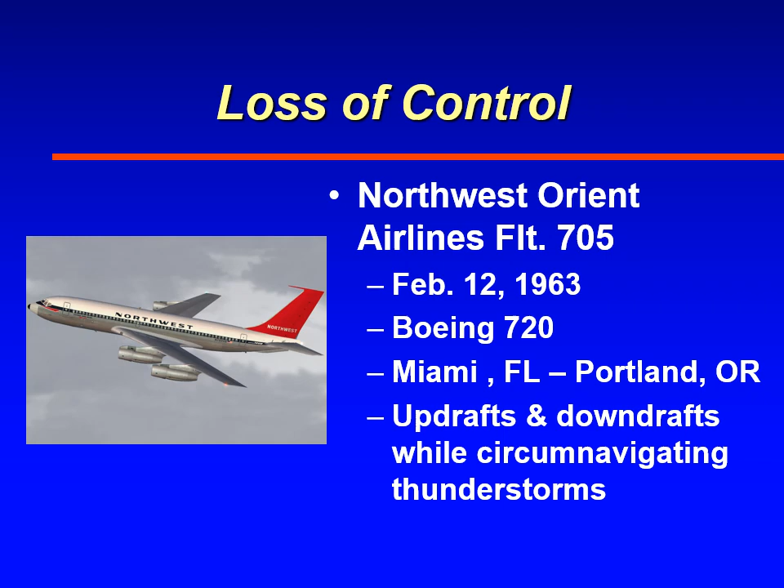Those strong updrafts and downdrafts resulted in moderate to severe turbulence. The flight crew lost control of the aircraft. After the accident, the investigation found the aircraft had been overstressed. They said that it experienced plus 1.5 to minus 2.8 Gs. So the flight crew lost control of the aircraft. As the aircraft was overstressed, it broke up in flight, and as a result, it crashed in the Florida Everglades, killing 43 people.

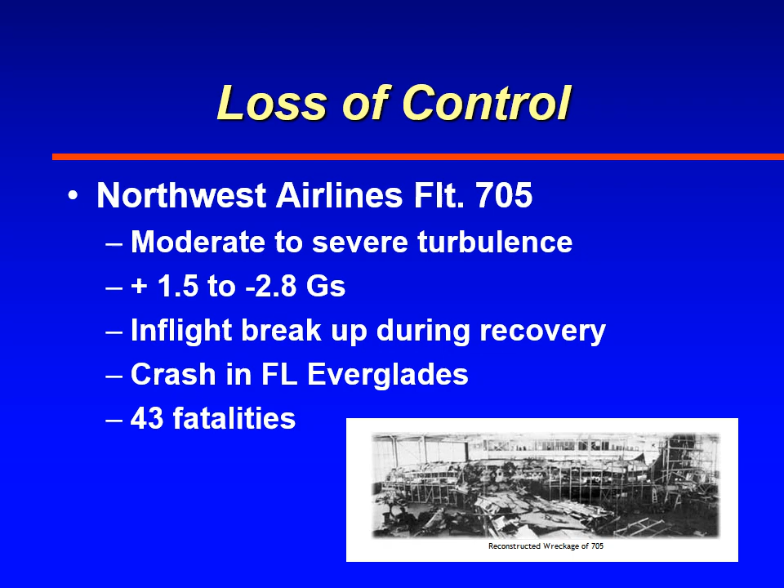Another hazard associated with aircraft encountering turbulence is airframe damage. There are a number of examples of airframe damage, aircraft being overstressed and experiencing structural damage as a result of turbulence. We're going to look at a few. The first one deals with the British Overseas Airways Flight 911, which happened back in 1966. This was a round-the-world flight.

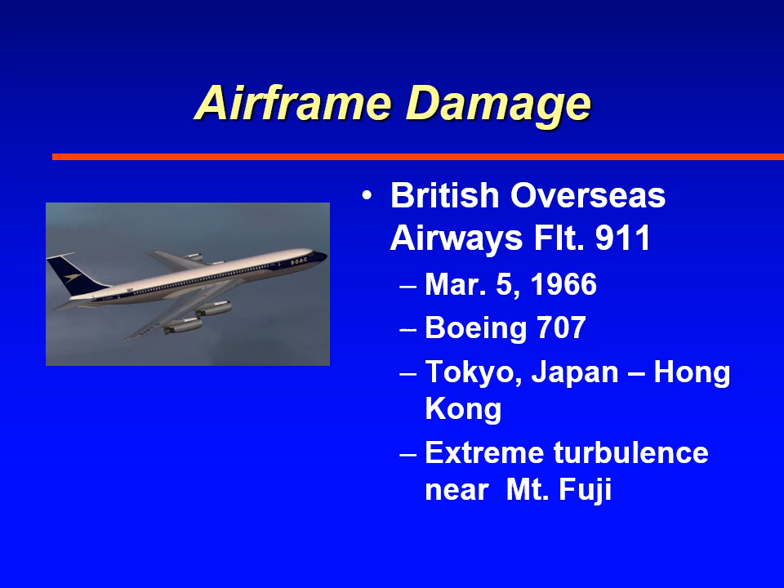The aircraft departed London on its way around the world with tourists, and one of their stops was Tokyo. They overnighted in Tokyo, and they were departing the next morning for Hong Kong. Since this was a tourist flight, they were going to circle around Mount Fuji. As the aircraft circled around Mount Fuji, it experienced extreme turbulence. The extreme turbulence resulted in the aircraft breaking up in flight at about 17,000 feet, and all 124 passengers and crew died in the accident.

There are several pictures that resulted from this accident. Mountain climbers actually got pictures of this as they climbed the mountain. And then also a U.S. Navy A-4 attack aircraft was dispatched in short order after the accident to fly around the mountain, and that aircraft experienced plus 9 to minus 4 Gs.

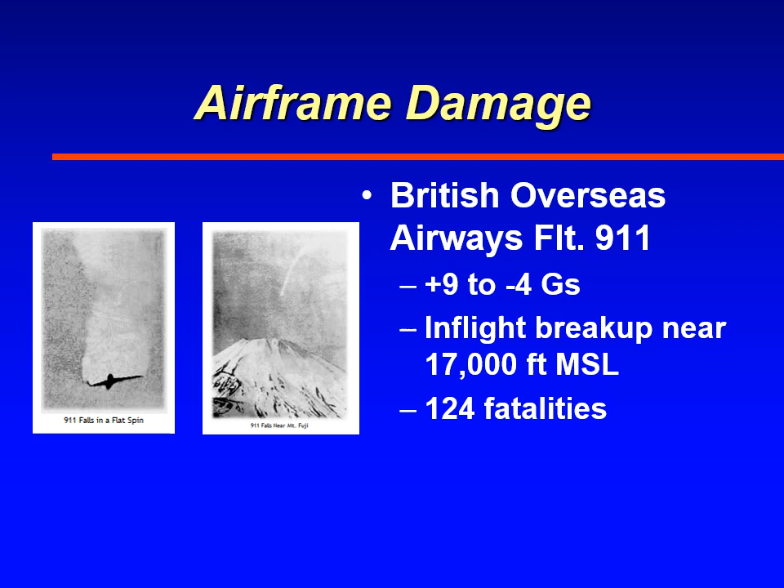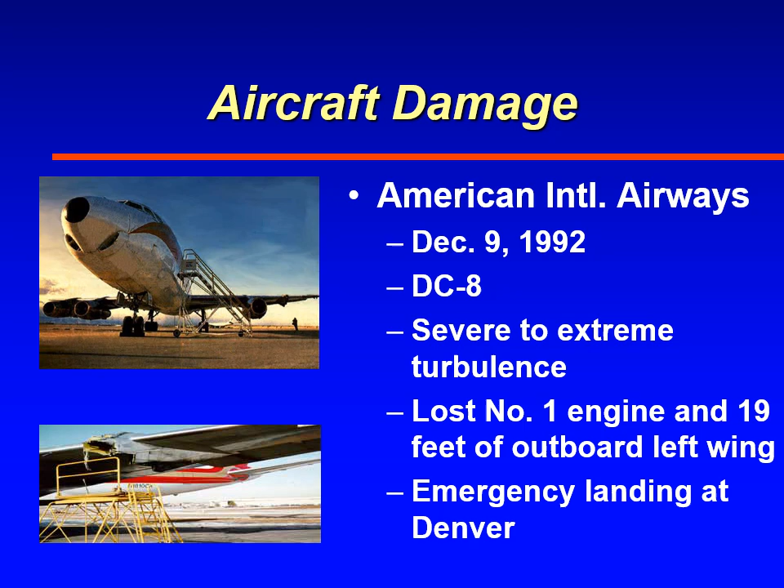Here's another example of structural damage resulting from turbulence. This aircraft was a DC-8 flown by American International Airways. It was a cargo hauler. They were flying over the Colorado Rocky Mountains on December 9, 1992. The aircraft experienced severe to extreme turbulence. As a result of the turbulence, the number one engine departed the aircraft, as well as 19 feet of the outboard left wing. The aircraft made an emergency landing in Denver, where these pictures were taken.

Yet another accident resulting from severe turbulence, which caused structural damage to the aircraft, was JAL 46E, which happened back on March 31st, 1993. It was a 747 freighter. They departed Anchorage, Alaska, bound for Chicago, Illinois. At 2,000 feet MSL, the aircraft experienced severe to extreme turbulence. As a result, the aircraft lost its number 2 engine, and the aircraft was able to safely land back at Anchorage.

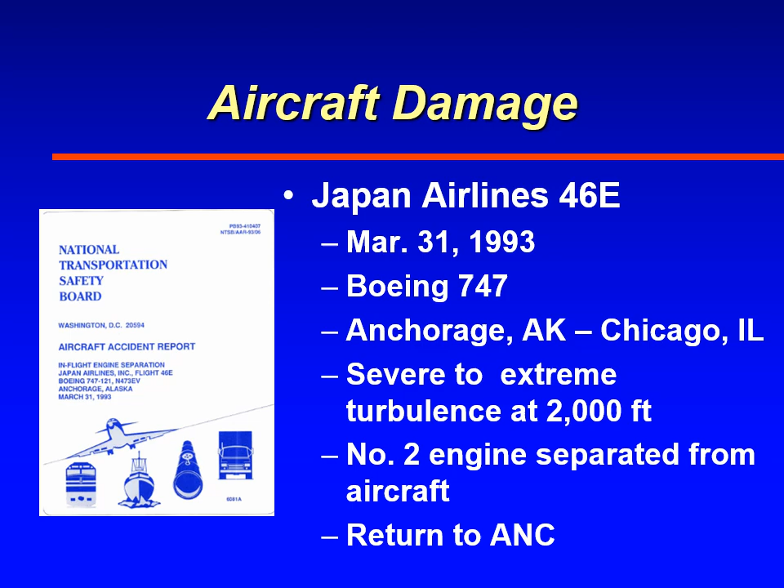Probably the most memorable accident that resulted from severe to extreme turbulence happened back in 1964. A B-52 bomber doing a test flight at low altitude near Pikes Peak in Colorado experienced violent turbulence, and as a result, the aircraft lost its vertical stabilizer and rudder, and the flight crew were able to keep the aircraft aloft for 4 hours. They eventually landed at Wichita, and this is all documented with video.

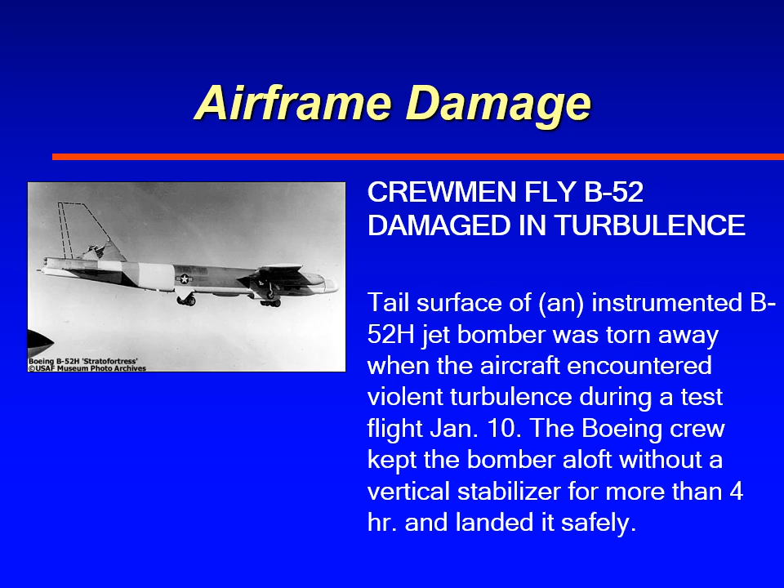You can see the video on YouTube, and also there is an accident investigation that was done by the Air Force, which is also a video on YouTube that you can watch. The tail surface of the aircraft, of course, was ripped away during an 8-second period where the aircraft experienced violent turbulence. The aircraft, without a vertical stabilizer or a rudder, yawed back and forth in a 20 to 30 degree arc, but the aircraft maintained altitude. Once again, go out to YouTube and watch the accident investigation video.

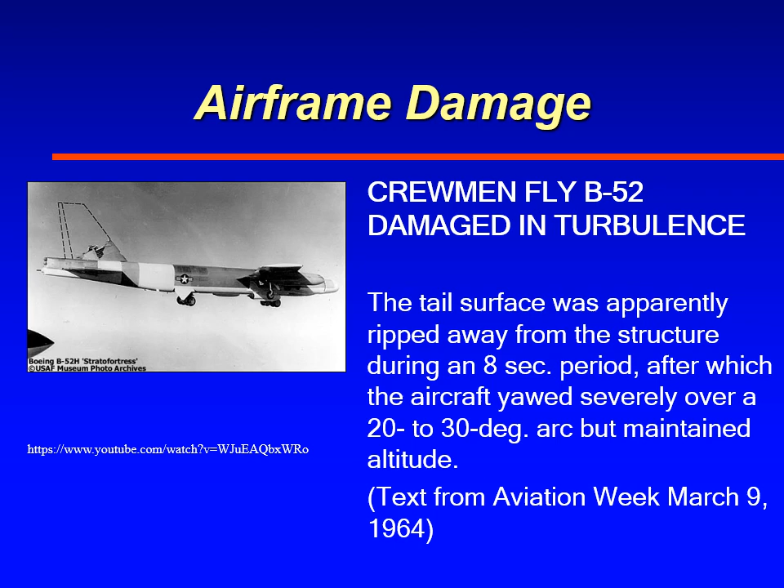Another hazard associated with aircraft encountering severe turbulence is passenger safety. Every year there are a number of accidents that result from passengers being injured on commercial aircraft. Here is one that is very memorable. It was back in December of 1997. United Airlines 826 was flying from Tokyo to Honolulu when it encountered two very closely spaced severe turbulence encounters.

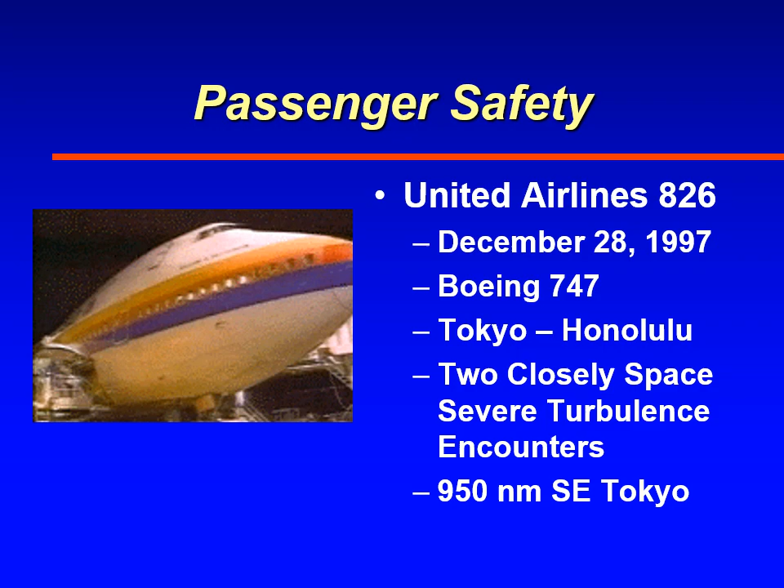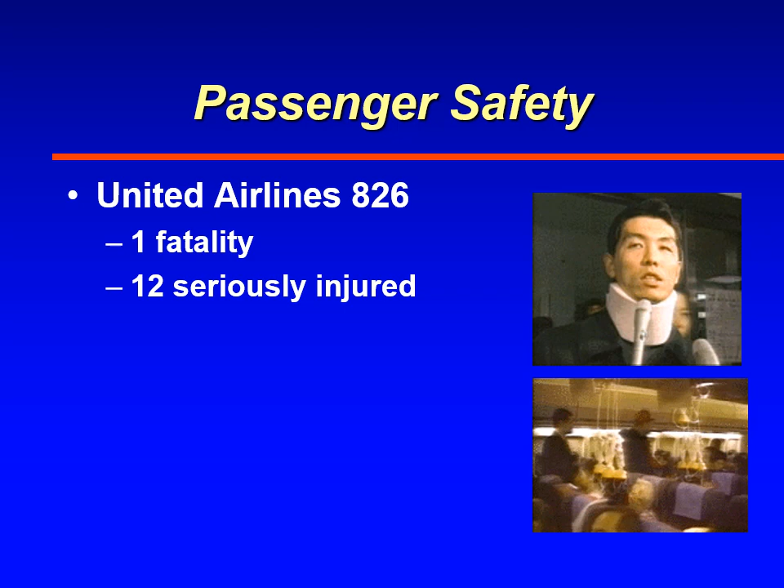This happened about 950 nautical miles southeast of Tokyo. The severe turbulence encounter resulted in one fatality. One passenger was killed, and 12 were seriously injured on the flight. We just saw how severe turbulence can be hazardous for aircraft and went through several examples. Now we're going to look at the accident statistics that have resulted over the years.

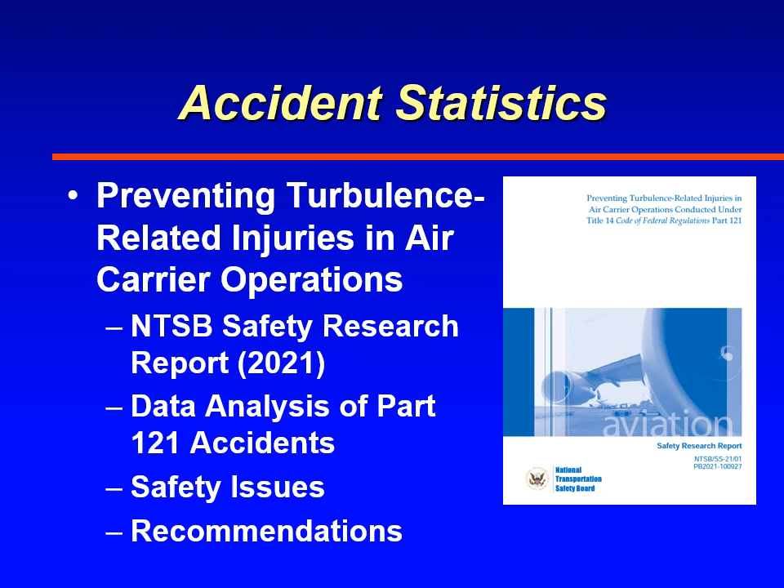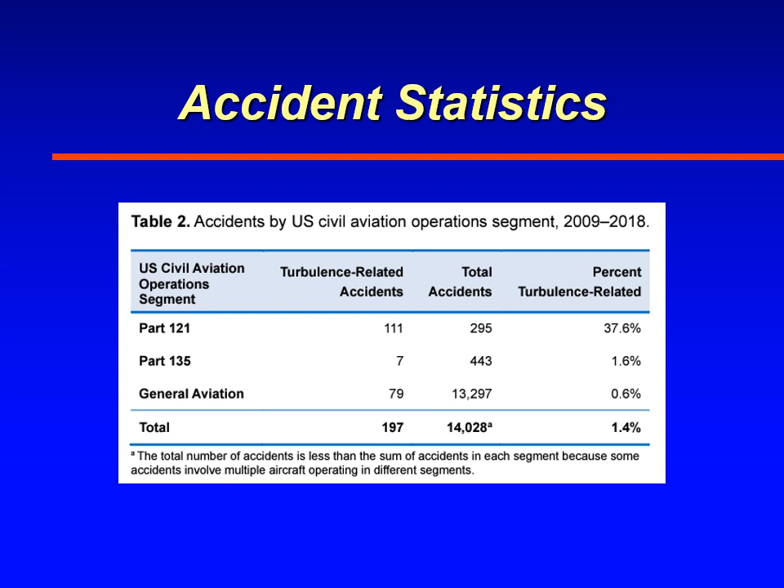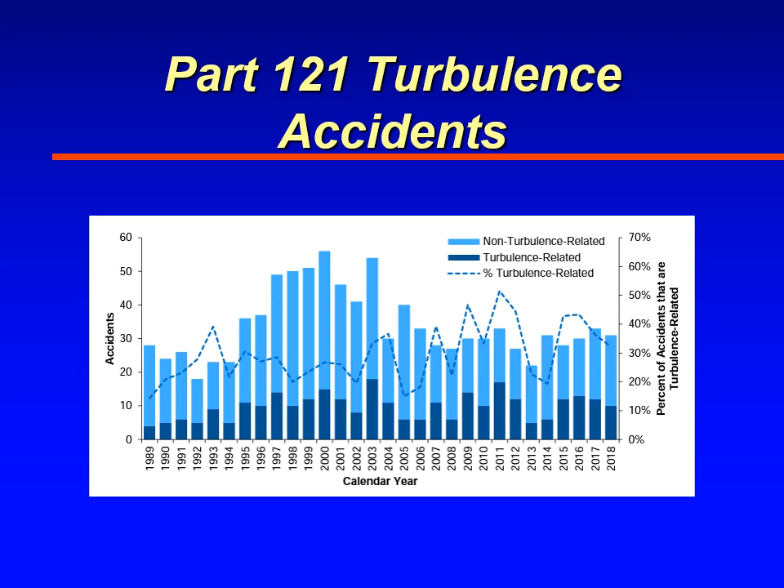The report showed that over a 30-year period from 1989 to 2018, there is no clear trend in the change of Part 121 turbulence-related accidents. Some years it's as low as 20% of all accidents, and other years turbulence caused more than 50% of all air carrier accidents. The report also showed that most Part 121 turbulence accidents were a result of convective turbulence.

In other words, thunderstorms, flying in close proximity to thunderstorms. Also, it showed a major contributor to Part 121 turbulence accidents was clear air turbulence, flying in the jet stream or around the jet stream where there is strong wind shear. And then finally, a smaller percentage was flying in mountain wave.

The NTSB report showed that most turbulence-related accidents occurred during the en route descent phase, just as the aircraft leaves cruising altitude and starts descending to their destination, followed by the second highest, which is en route cruise, when the aircraft is at flight levels and people are milling about.

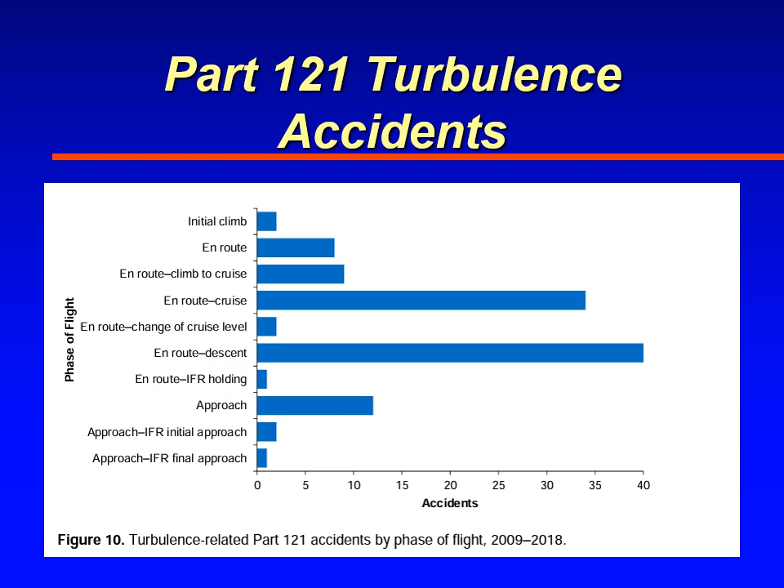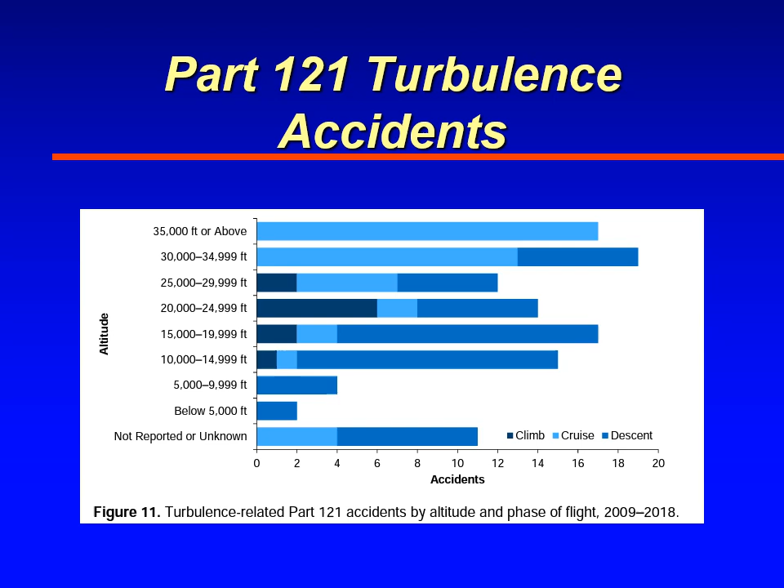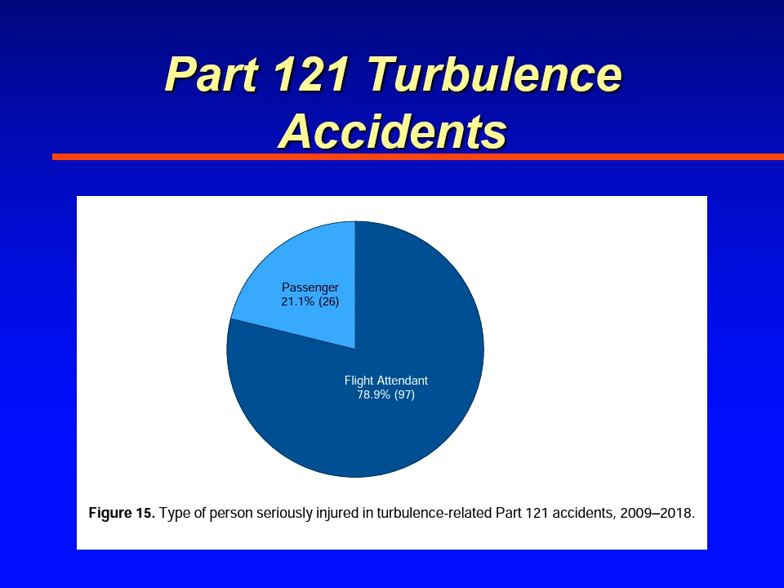The report also highlighted the altitudes at which these accidents occurred, and the majority occurred above 20,000 feet as the aircraft descends from cruise altitude. The NTSB report showed that flight attendants were the most likely recipients of serious injury as a result of turbulence. It shows approximately 78.9% of all injuries were encountered by flight attendants, whereas passengers were a smaller percentage, 21.1%.

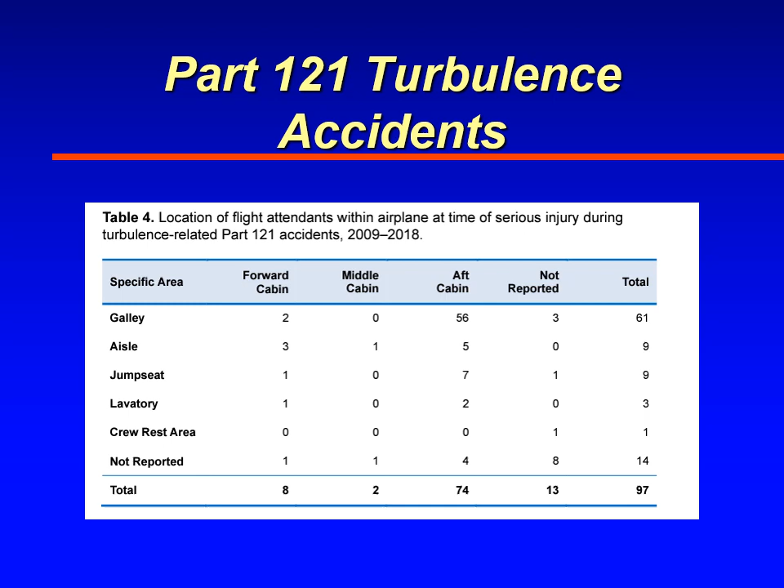The report highlighted the areas of the aircraft where flight attendants were most likely to get injured, and it showed that most were injured in the aft cabin, typically in the galley. Also near the lavatory and in the jump seat. Flight attendants were most frequently injured while preparing the cabin for landing during the descent, followed by conducting cabin service at cruise altitudes.

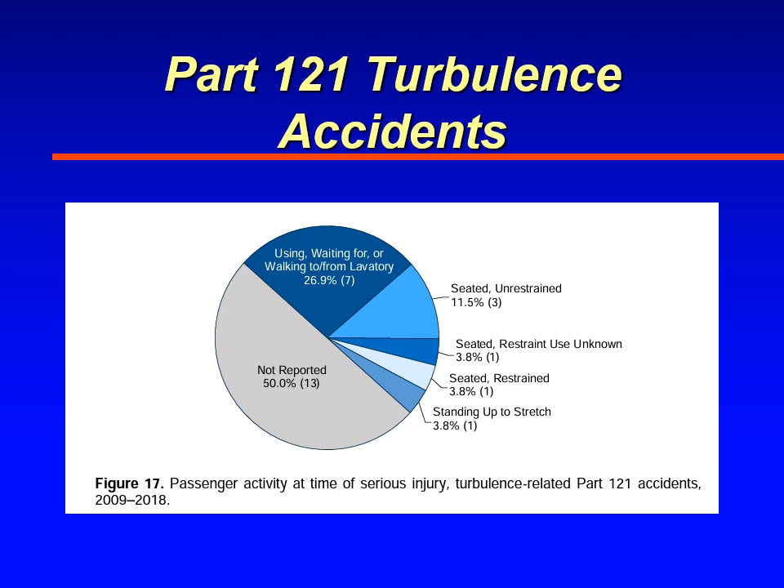Passengers were most frequently injured by turbulence when they were using, waiting for, or walking to or from the lavatory, and that was followed by seated unrestrained, which means the passengers are in their seats, but they were not using their seat belts. This diagram shows the seatbelt use for persons who were seriously injured in turbulence.

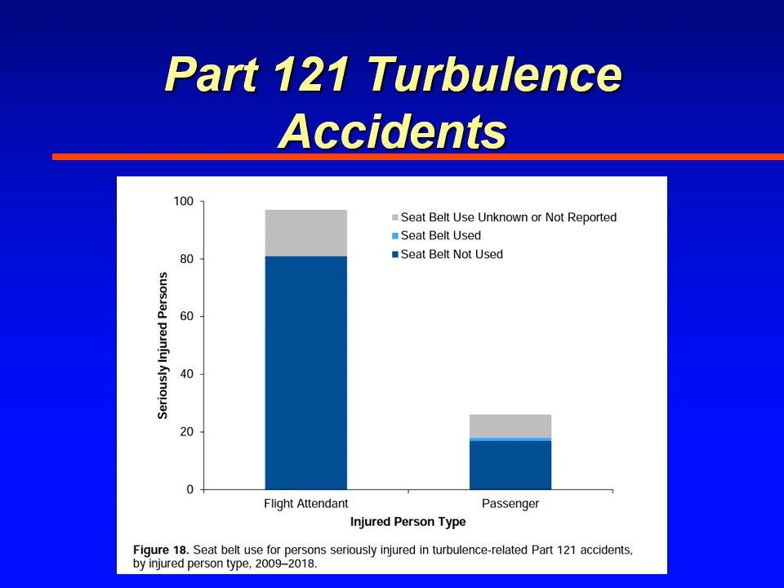And it indicates that flight attendants were injured most frequently when they were not using their seatbelts. Of course, they were up, walking around, and performing their duties. Passengers were also injured mostly when they were not using their seatbelts. It was very rare that someone was injured when using their seatbelt. I think in this investigation they found only one person injured who was using their seatbelt.

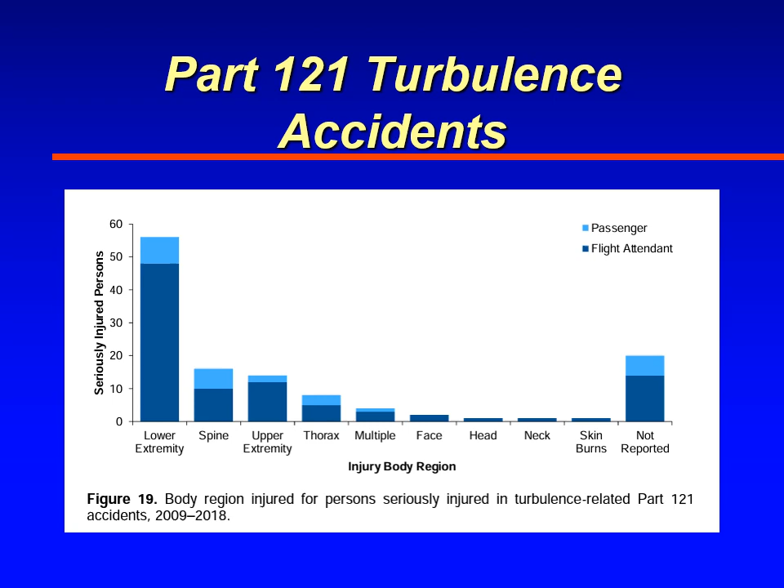The NTSB also analyzed the body region where people were injured during a severe turbulence accident, and the results showed that most injuries were to the lower extremity, both for passengers and flight attendants, followed by injuries to the spine.

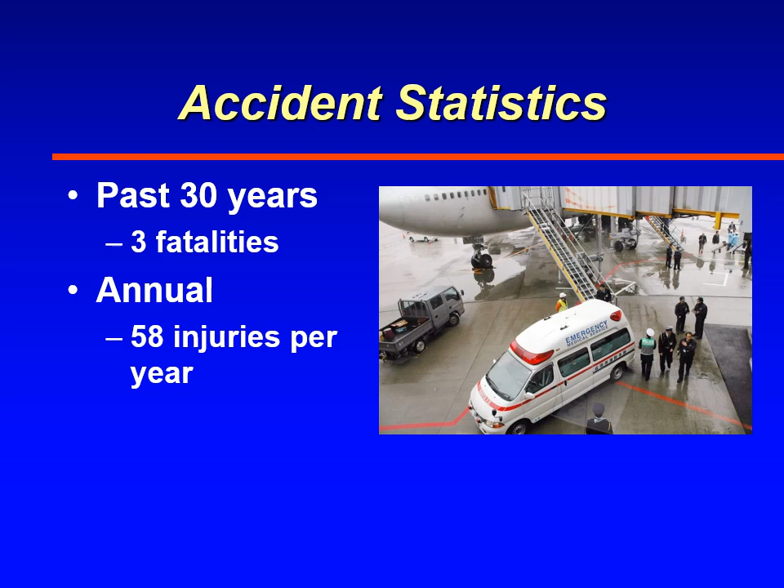Overall, in the past 30 years, there have only been 3 fatalities as a result of turbulence, but annually, there are typically about 58 injuries per year. That's a quick overview on turbulence-related accidents and the hazards associated with turbulence.